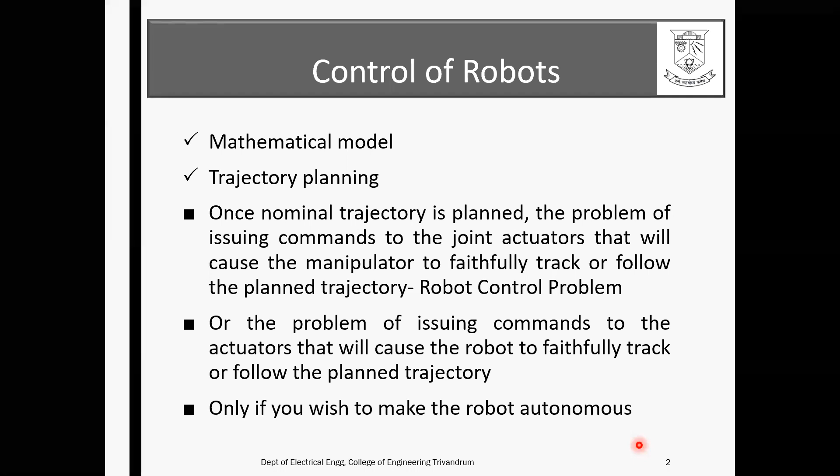See, otherwise, in some situations you don't need an autonomous robot. Okay, depending on the customer requirements, the robot can be autonomous, semi-autonomous, or whatever it is. Only if it is to be made autonomous, you need to proceed in this way, like the standard mathematical modeling, trajectory planning, and control.

So if you look at the standard design steps for the controller design, basically we'll start with a mobile robot or a manipulator. We'll try to get the mathematical model. So mathematical model means, as I was mentioning, it is basically giving the relation between the inputs and the outputs. Okay, the inputs and the outputs. Can I get a relation between these two?

So for example, all of us are familiar with a car, right? A car which we all are driving. So if you look at a car, what are the inputs to the car which we are giving so that we can successfully follow a track in a road? So we use the accelerator pedal, then we have the brake pedal, and then we use the steering. So we say that in a car, these are the inputs. We identify, when we take the car as a system, the accelerator, the brake pedal, and the steering.

So we are changing these three parameters for the car in order to get some x, y, z positions, or x dot, y dot, z dot values. See, when the car is moving in a gutter and all, we can definitely think that there are going to be these values. But see, we say that these are the inputs and these are the outputs.

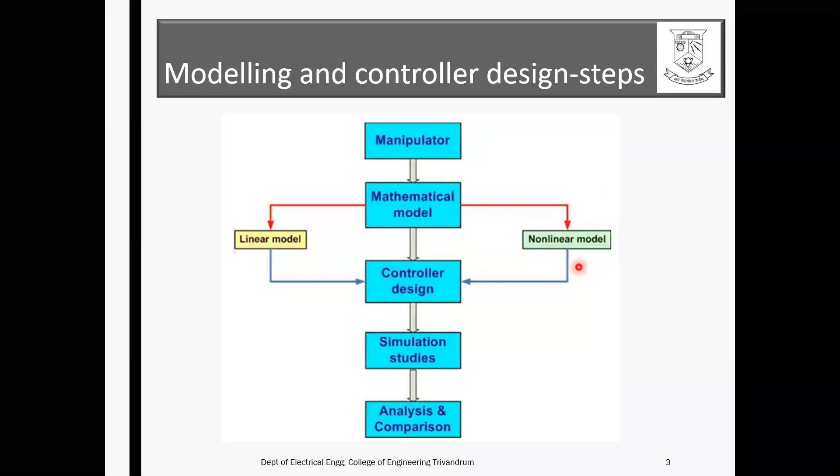So if it's a linear model, when we call a robot model a linear model, or any model, when it obeys the principle of superposition and homogeneity, we say that it is a linear model, else it is a non-linear model, and then we go for control design, right?

All of us are aware of a typical closed loop control schematic, wherein there'll be a system which we are going to control. There'll be a controller which is trying to help us achieve the desired objective. The desired objective will be given here. We'll be having the actual parameters, and we have the sensor, and if the actual output is not matching with the input parameter or the reference, the controller calculates inputs so that the actuator will act accordingly in order to get the desired output variable, right?

As far as robotics is concerned, instead of this, we'll be considering a robotic manipulator or a mobile robot. The one main point I wish to convey is that robotics is an interdisciplinary area, right? Wherein different engineers like mechanical, electrical, electronics, computer science can contribute. So it all depends on which area you are working.

There are some people who wish to model the robot using AI techniques and learning methods. If that is the way you wish to proceed, that is also possible. The only thing is that somehow or the other, you should know the input output relations of the robot, or what we call the model of the robot. So that's the main point I wish to convey.

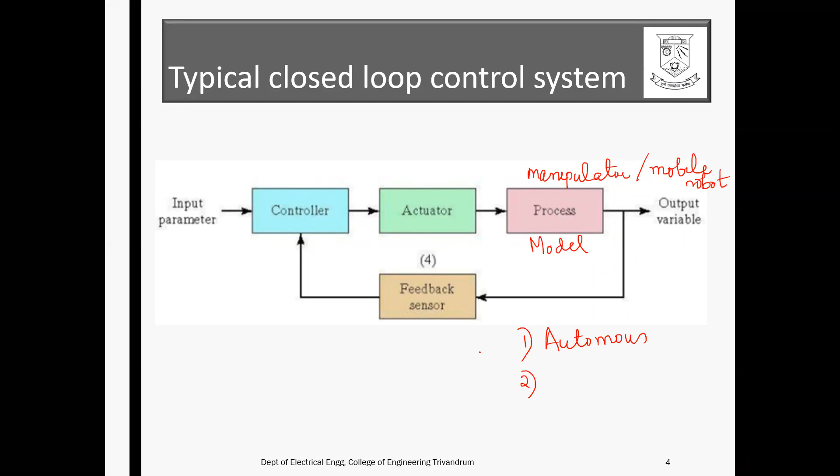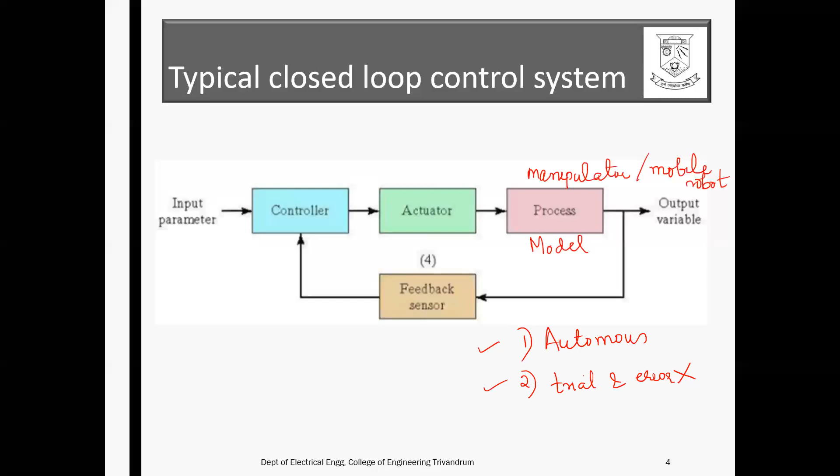The conditions are that you wish to make the system autonomous, that's the first condition. If you don't want to make your robot autonomous, no need of this. And two, you are not going to use trial and error. If you need these two things, then you should go for these kinds of control methodologies for control of the robots.

If you consider a robotic manipulator, as in the previous case I was explaining, you will be having the actual values. It will be the joint position and velocities. You will be having the reference values. In general, as it is represented as generalized coordinates, the reference will be given as the joint position, joint velocity, and acceleration. The reference and the actual value are compared. You have the sensor to measure that, and the controller will try to actuate the motors which are kept in the manipulator, so that you get the desired output.

In order to get the desired joint profiles, you may have to do something else. That is actually a trajectory planner, which is the outer loop. We'll be giving the desired task specification. That means the end effector has to move from this point to this point. That may be the task. Corresponding to that, the trajectory planner will be computing this. All these will be functions of time, q(t), q dot(t), and q double dot(t).

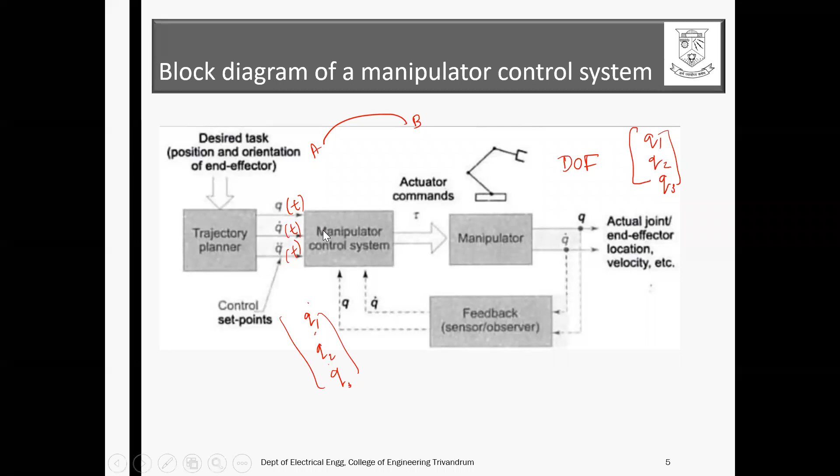Depending on the degrees of freedom of the robot, this q will have different dimensions. If it's a 3 degree of freedom robot, it will be q1, q2, q3. Three values will be there, and also q1 dot, q2 dot, q3 dot. So depending on the robot configuration, the dimensions will vary. This is a typical block schematic of a robot manipulator control system.

And this is the case of a mobile robot. In the case of a mobile robot also, if you try to solve the problem in a very simple way, you can say the desired X and Y positions are given. You need to just position the robot at a particular point. From one particular point, you need to reach another point. So if that is the case, you need to check.

This is actually the actual position, and this is the reference position. And then the actual values and the reference values are compared. Definitely, you need a sensor for measuring that. And then you compare these two, you will get the error. And the controller will be feeding the right wheel velocity and the left wheel velocity, which are the control inputs of the mobile robot.

Okay, so you might have done similar problems, maybe because you are interested in robotics. Some of your students might have done this problem. For example, imagine a situation, because nowadays many teams are working on employing robots in hospitals to support COVID affected patients. Suppose that is the scenario, and you wish to make the system autonomous.

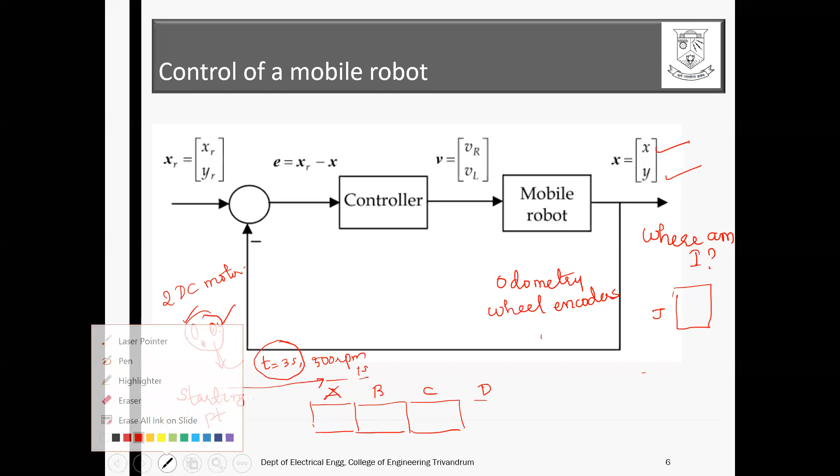So basically we can rely on odometry for knowing the answer to the question, where am I, but not for long distance paths. So basically I was referring to a practical example wherein these kinds of control play a very important role. So you don't have to solve that problem using a trial and error method.

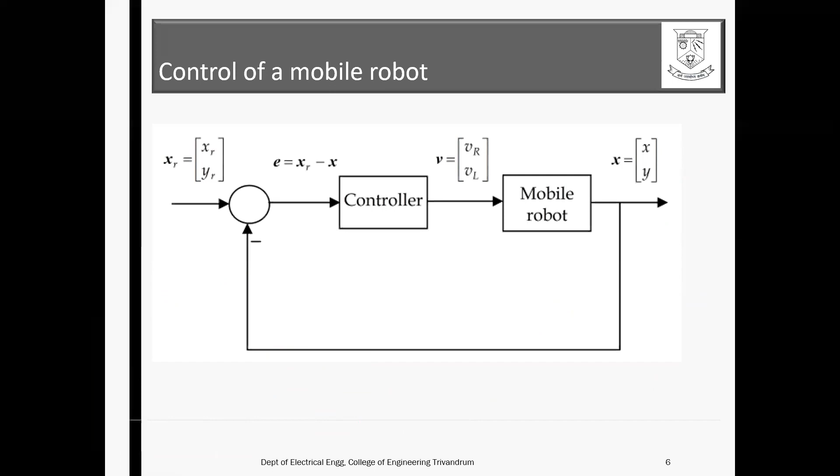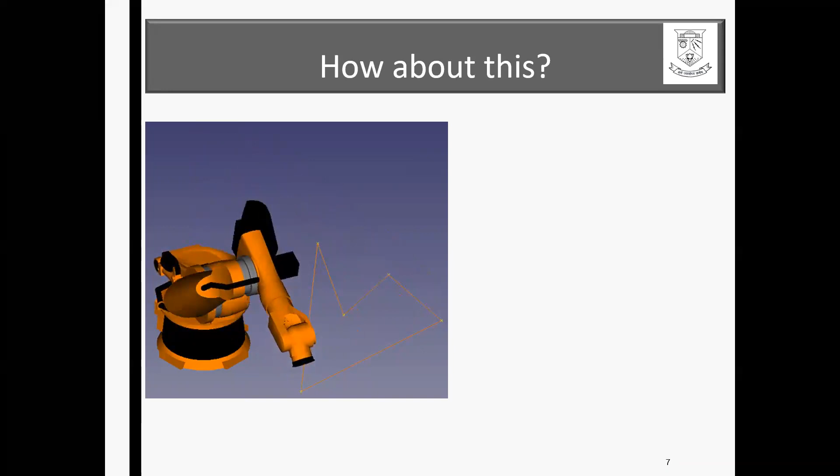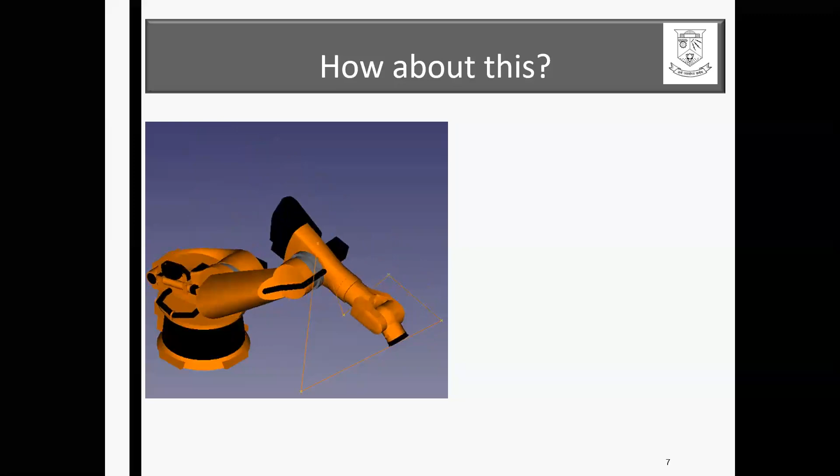Suppose you need to design a manipulator so that it moves through a path like this. Many times we see students working on projects or building manipulators, but they are not able to move the robot through desired points like this. The reason may be that they have not used the kinematic model. Just by trial and error they try to design the robot. That should not be the case, right?

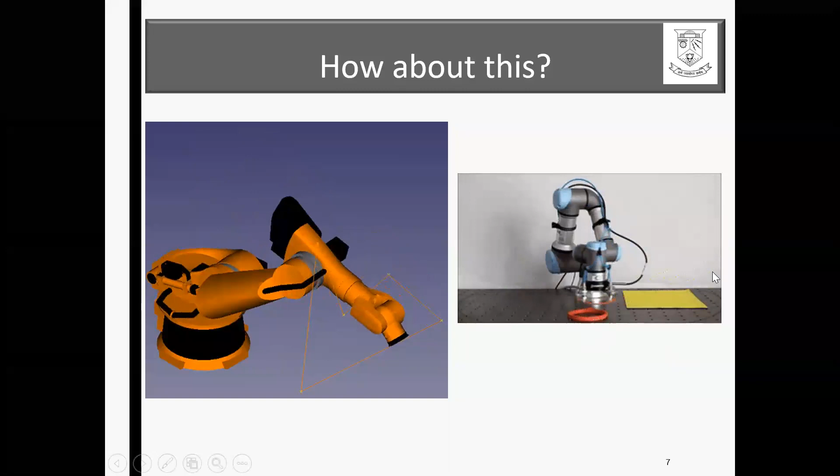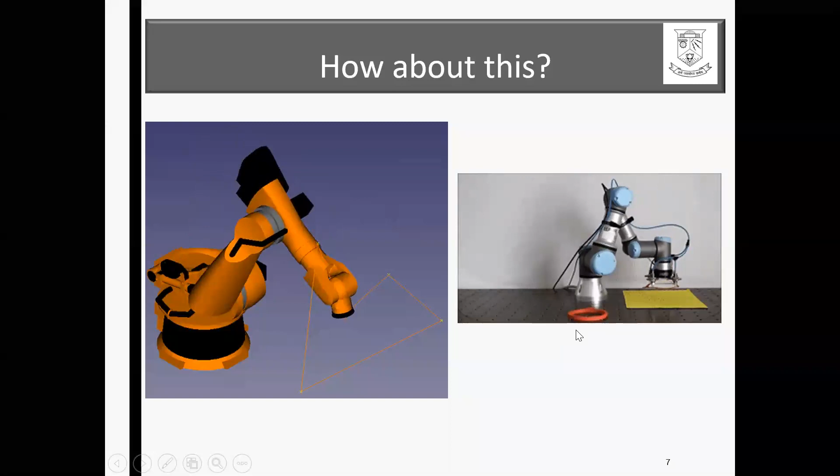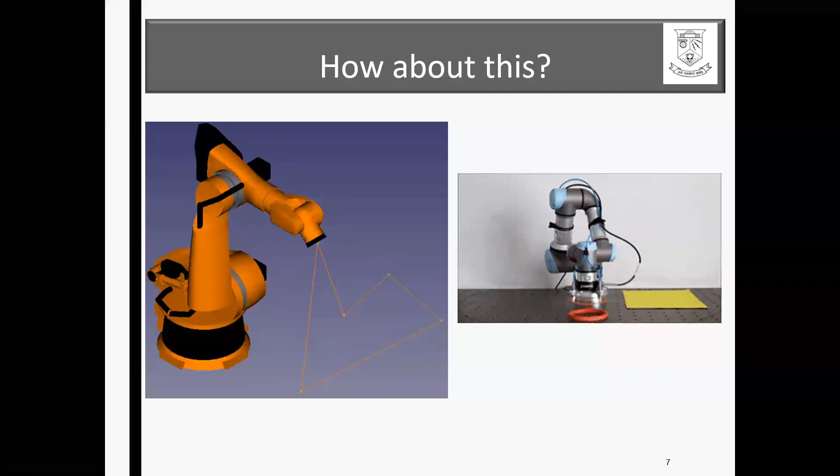Suppose you have a specific pick and place task like this, and this is a fixed point and this is another fixed point. You cannot vary them. So definitely you have to use the standard kinematic models. Only then will you know the workspace, whether I can keep the object at the desired location. All those things can be known only if you design controllers based on the model. So what I am trying to explain is the importance of knowing the input-output relations or mathematical model, and then designing the controller rather than trial and error.

And as engineers or as students, we tried to design line followers like this. So have you ever imagined a robot following a path without drawing a line? That means a straight line or circular path. It is possible, provided you have the input-output relations of the robot, and then you design a controller for the same.

So I'll show you an experiment done by my BTech students. You cannot see a line drawn, a circle drawn there, but you could see that the robot is moving in a circle, right? So how do we achieve this? Can you do this?

Suppose people try to solve this problem using trial and error method. But suppose when we wish to increase the radius, or change the center of the circle in which the robot has to travel, for all these things, you cannot do trial and error infinite times.

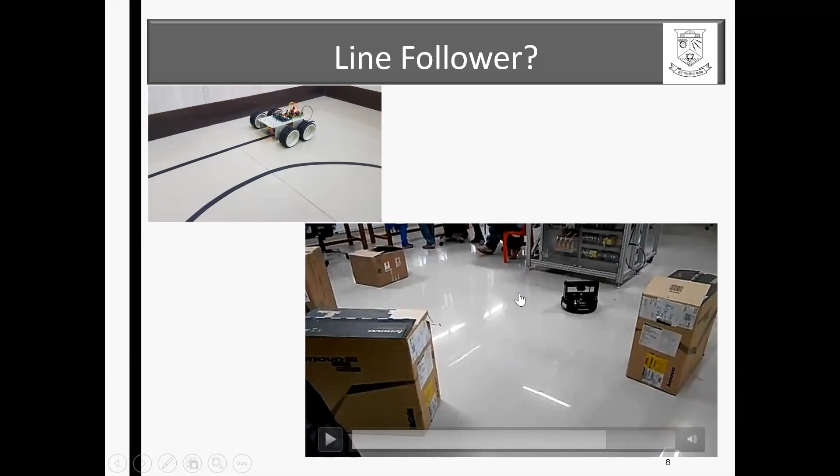So if you have these input output relations, and if you can design a suitable controller, you will be able to achieve tasks like this. If the robot is used as an office assistant, you cannot have a line drawn everywhere for the robot to move through. It should autonomously navigate and go to different staff rooms or office rooms. You might have seen robots moving like that. So you need to make it autonomous, and then only the robot should move forward.

So now what I'm going to do is take a very simple example of controlling a mobile robot, because this is the easiest way to convey the importance of taking the input output relations or mathematical model of the robot, and then designing a controller to make it autonomous. If you understand this concept, you will be able to work with a complex model as well.

So what I'm going to explain now is the control of a differentially driven mobile robot. If you look at this robot, you could see there are two wheels, but we know that with only two wheels there will be some balancing problems. So what we do is provide a caster wheel at the front, which acts as a support so that it won't topple. So if that is the situation, how do we model this robot?

I told you that to make a robot autonomous, we should have an input output relation. But that relation should not be a complex equation with many variables and 24 degrees of freedom. You start with a very simple model, work on that, and then incorporate other effects and proceed. That's the easiest way. So I have taken a very simple example so that all of us will be able to follow it.

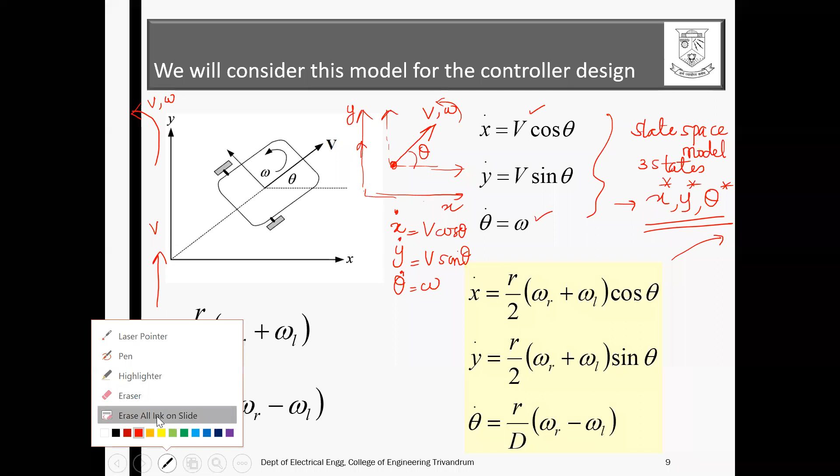But unfortunately, if you look at this model, when we take a robot in our hand, a differential drive robot, what we can directly control is this right wheel velocity, which we call omega r, and left wheel velocity. So this is just linear velocity and angular velocity.

Definitely we know that if you know the linear velocity and angular velocity of the vehicle, we can find what is omega L and omega R. There is a relation, right? It is directly given by the relation.

Linear velocity of the vehicle is actually r by 2, where R means the radius of the wheel, divided by 2 into omega r plus omega L. So the linear velocity is proportional to the sum of these two velocities, and the angular velocity is proportional to the difference in these two velocities.

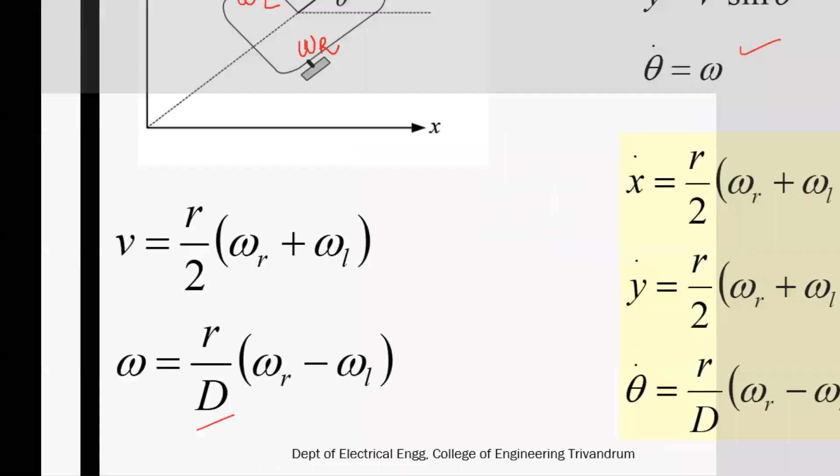D is the wheel base, we say. Wheel base means the distance between these two wheels. So that's the wheel base. And if you know these parameters, you have this relation.

So when we substitute this V and omega using this relation, what we are getting? In terms of omega R, the right wheel velocity and left wheel velocity, we are able to represent this equation. So this is the final model which we are going to choose. We say that the input variables are omega r and omega L, and the output variables are x, y, theta.

So I got this, and now what I need to do is just find what is right wheel velocity and left wheel velocity at each point of time, so that I can drive this robot to the desired destination or desired path. I'm not going to explain very complex controllers. I'm going to explain a very simple controller which will be able to do very simple tasks, which can be extended to realistic applications also.

Suppose if the robot has to be moved to a point, if we use a very simple proportional controller, that task can be achieved. How can that be done? I told you that if you look at this equation, the variables in our hand are right wheel velocity and left wheel velocity.

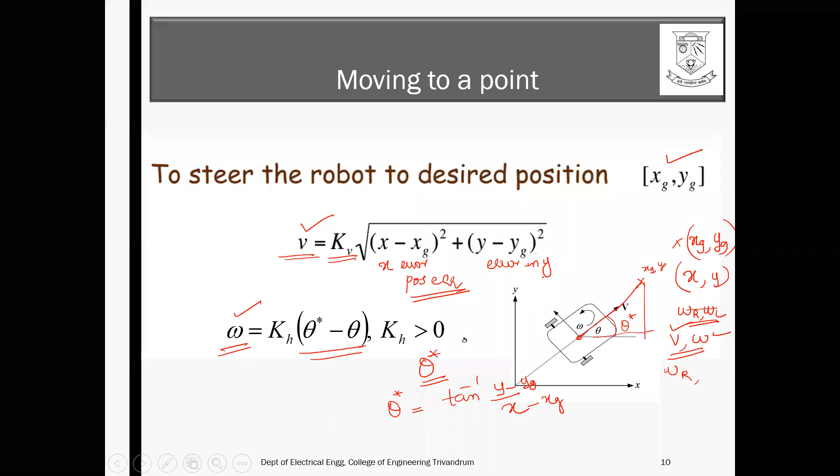So what I was mentioning related to the robot for helping or employed in a COVID ward, we can use a similar kind of algorithm where the v and omega, if we are getting from that, we can find left and right wheel velocity so that we'll be able to reach the destination.

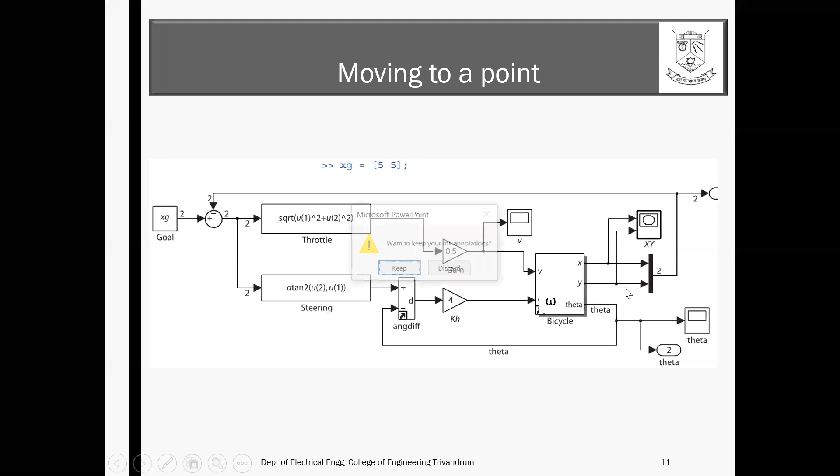Okay, so the same problem I'll just show you, which I have done in MATLAB. Moving to point, can you see the MATLAB screen? Okay, if you, okay, I'll run this.

So here what I have done is, I have taken the initial position as 0, 1 of the robot, and I have taken 5. Can you see the graph now? Yes ma'am. Okay, so see it is reaching the destination 5, 5.

So even if you change, see, I have given 0, 1, pi by 3 as the orientation. So if you look at this, 0, 1, pi by 3. So if I take 1, 1, let's see, we'll just check how. Maybe another color I'll take.

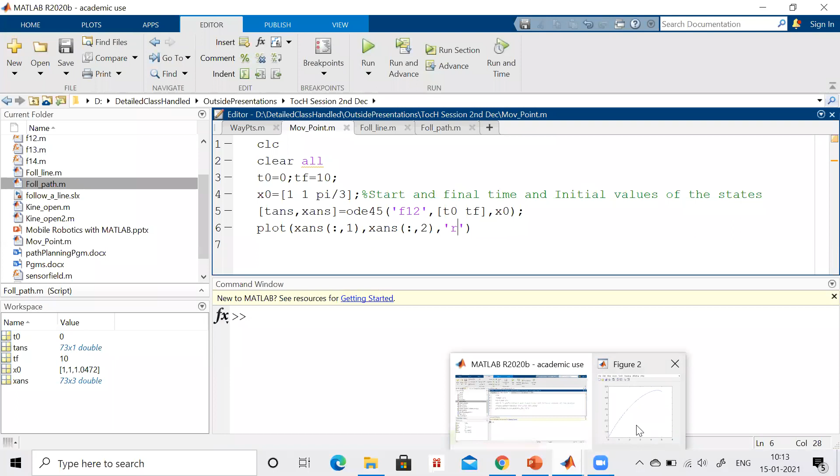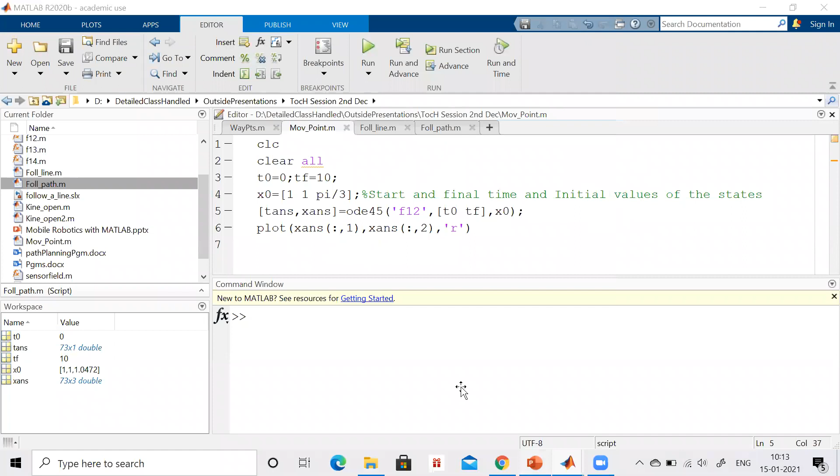See, from a different location also it is moving. So in the COVID ward case also, if you have different locations like this, point A, B, you will be able to use the same method for that case also. Okay, so the consolidated results are shown here, wherein you can see that from any location the robot is able to move to the desired location.

So here the destination is chosen as 5, 5. Okay, so there is no need of trial and error, right? You just find the value of left wheel and right wheel velocities from this equation. And then at each and every instant of time, feed that value to the robot so that it will autonomously reach the destination without trial and error.

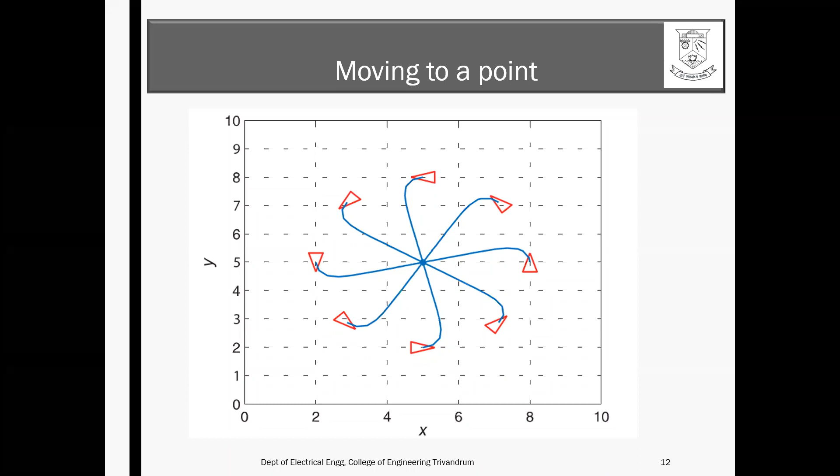So next task is following a line. Okay. So why am I taking these? Maybe some people may be thinking, okay, this is something trivial. Why should we do that? But why? Sorry.

Okay, why I am explaining this is because, see, if you can move a robot to a point, and if you can follow a line and if you can follow a circle, any trajectory following task will be a combination of all these things. Okay, so if we can independently do all these things, any realistic path is going to be a combination of all these things, right? So that's why I'm explaining this simple problem. The realistic scenario will be a combination of all these.

So if the robot has to follow a line, all of us are aware of a line follower robot where the line is drawn and over which the robot is moving. So just imagine a line virtually drawn in front of you parallel to your table, and you ask the robot you build to follow that line. How to achieve that? Generally what we do is trial and error, but that's not the case.

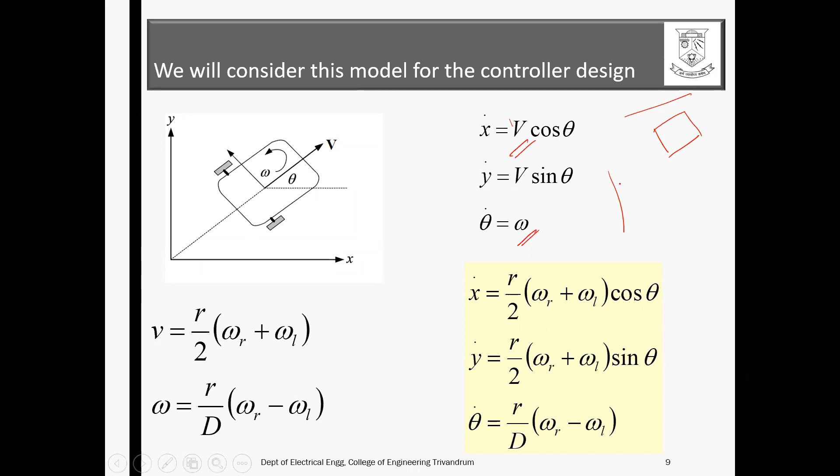What we need to do is just choose this model, and intelligently find what should be V and omega so that I can follow that line which is drawn parallel to my table, or wherever you are drawing, without that line physically drawn. So how do we represent a line? Line is represented as y equals mx plus c. Instead of that, you can also write a line as ax plus by plus c equals 0.

And suppose the robot position is this, and the line to be followed is somewhat like this. So what the robot should do is try to reduce the normal distance, right? So that is what is done here. One controller steers the robot to minimize the robot's normal distance from the line, which is given by this relation. So all of us know the distance between, sorry.

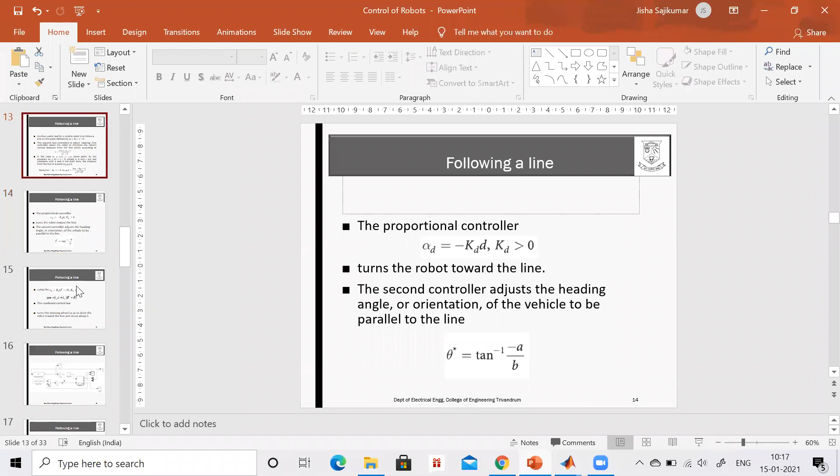So how to find the distance between these 2 points, that is, from where the robot is and the point in the line? In case of a line in the plane given by equation ax plus by plus c equals 0, where a, b, c are real constants, the distance from the line to a point x0, y0. So we have the line here and the robot here. You need to find the perpendicular distance, the normal distance.

Suppose the robot position is x0, y0. At each point you know the x and y value of the robot, then you can find the distance using the standard relation. And what we do is we will try to find a component which is proportional to this distance. So we should try to reduce this distance, right? Simple logic. So you need to use one term like this.

This one is trying to reduce the distance. Another one is it should turn towards this direction, right? So that is achieved by using theta star, the reference heading angle, equal to tan inverse minus a by b. So if you have a y equals mx plus c line, we know slope is m.

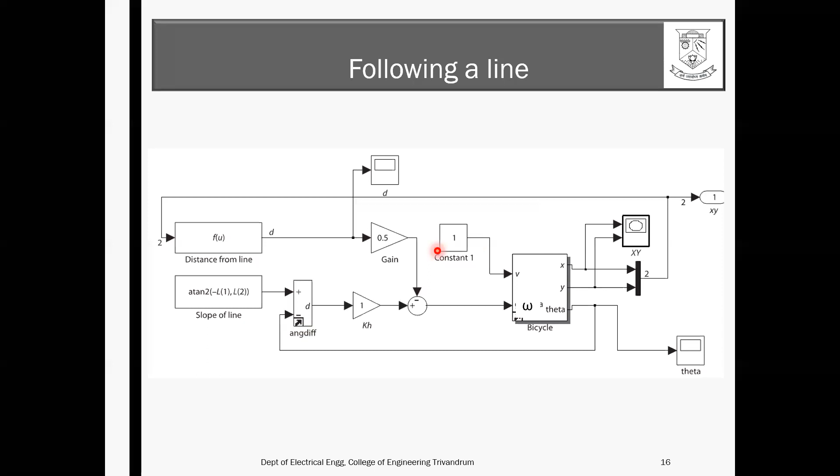But see, this is only the angular velocity, right? The linear velocity can be chosen as a fixed value, and angular velocity can be given like this, so that the robot will turn towards that line and it will be following that line. So this is the typical block diagram. Distance from line is calculated, the slope of the line is calculated, and the controller will try to, it's a very simple control. See, the linear velocity is chosen as 1 and angular velocity is chosen using this expression.

So if we have A, B, C as 1, minus 2, 4, we have the straight line like this. And suppose the initial position of the robot is 8, 5, pi by 2. So the mobile robot heading angle is like this, and it will be following the line in this way. So wherever you draw a line, it's just a matter of finding what the A, B, C values are, and then you give the initial pose of the robot, so that the robot will be following that line.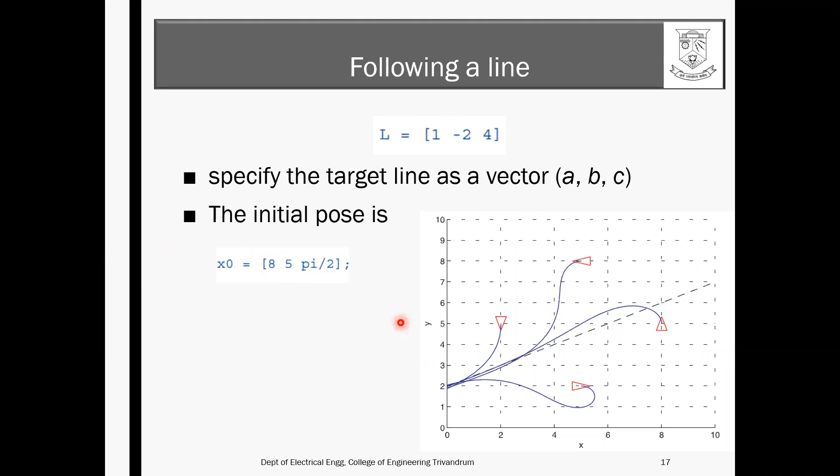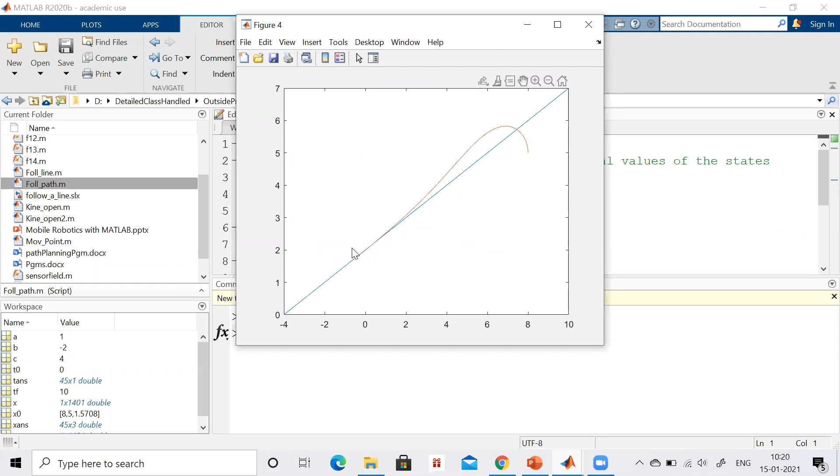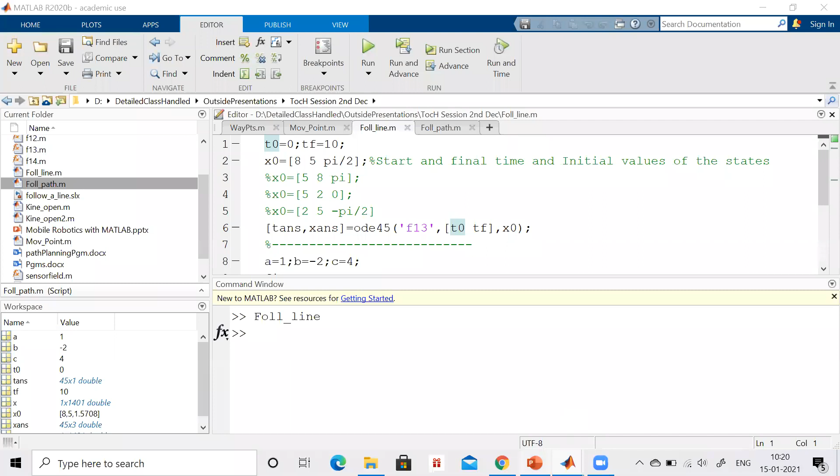So I was showing the simulation of that as well. See, the line is chosen, and this is the initial position of the robot, and the robot is able to follow the path. So basically for initial testing and understanding of the algorithm, MATLAB is the best option. Once you are comfortable with that, you can switch to realistic processors to implement the same.

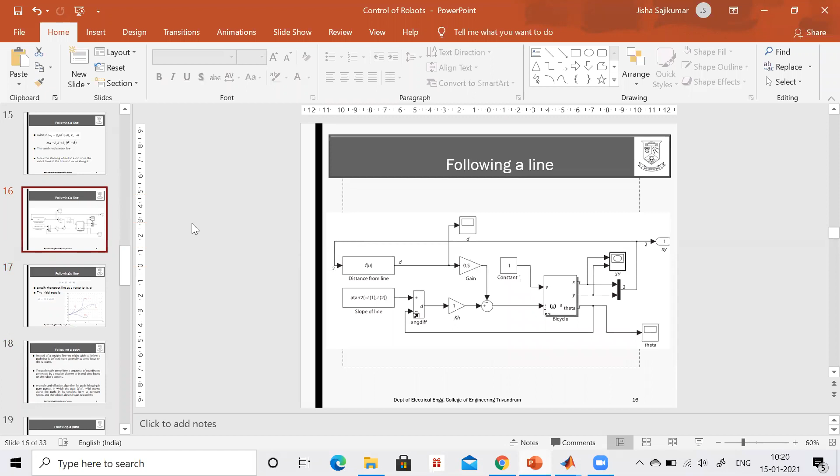So suppose you wish to implement this particular controller in hardware. How will this work? We have v equal to 1 and omega given by this expression, right? So at each and every instant of time, you need to know what is x, what is y, what is theta. So you need to use sensors, encoders, to find x, y, theta.

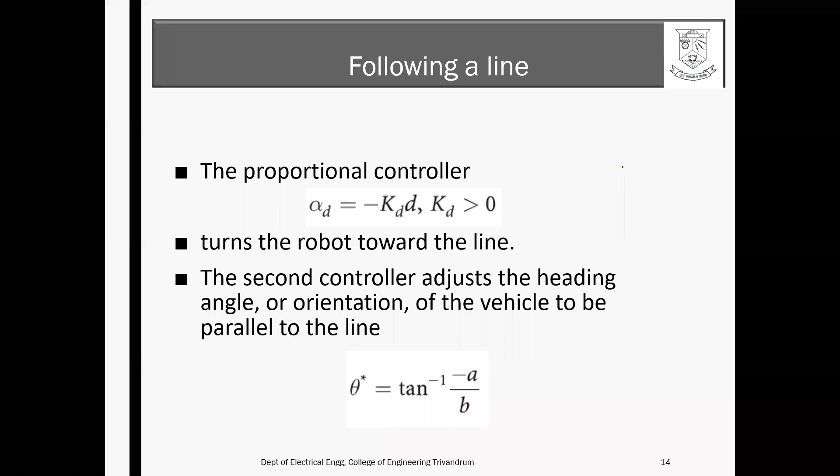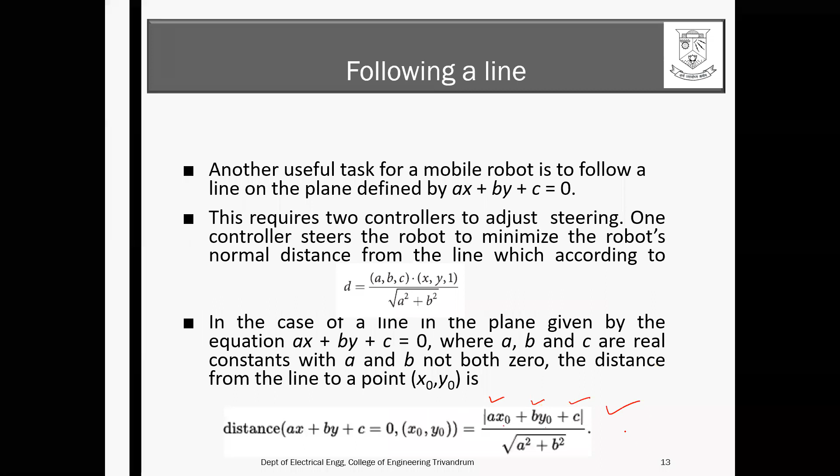And you have the a value, b value, c value, and you have x and y at each and every point. So at each and every point you can compute d. You need to take sensor feedback: at each point you take sensor feedback, x, y, theta, and compute d. Then for omega, you compute kd into d, and also kh into theta, so that you get the value of omega. So you got the value of v and omega.

From this, for each sampling instant, you find omega R and omega L. Then in the next program, you drive. For different controllers, the command will be: drive motor 1 at the omega R value you got, and drive motor 2 at omega L. So for basic understanding, definitely this will be helping.

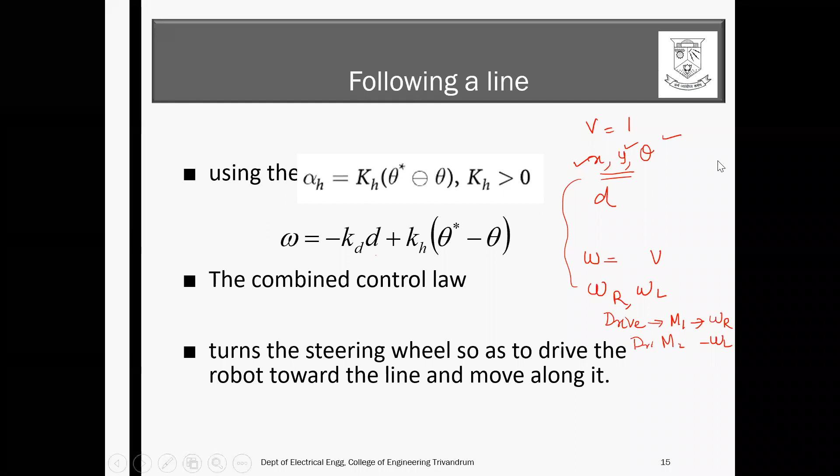And similarly, the more realistic case is following a path. Following a path means a curved path, or a circle. If you can solve the basic problems like moving to a point, following a line and following a path, you'll be able to follow any complex path. It's just a matter of representing that path. How do you represent a path? That is very important.

For example, just imagine you are driving your car and taking a circle. If that is the situation, what will be the x of t and y of t profiles?

So this is in the xy plane, on the ground. Your car is taking a circle, so you should know what the x(t) profile and the y(t) profile are. So you should have an understanding of the reference profiles. Generally, if the car has to take a circular path, you can just take sin t and cos t as the reference. You will be getting a circle with (0, 0) as center and 1 meter as radius.

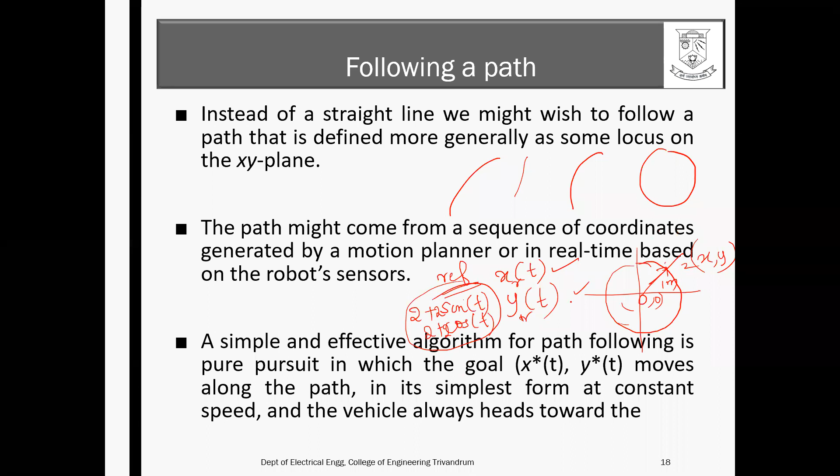If you wish to change the center to (2, 2), you need to give the reference as 2 plus, like that. If you wish to change the radius to 2 meters, it's just a matter of giving 2 here also. So by properly choosing the reference trajectories xr(t) and yr(t), you will be able to get the desired trajectories.

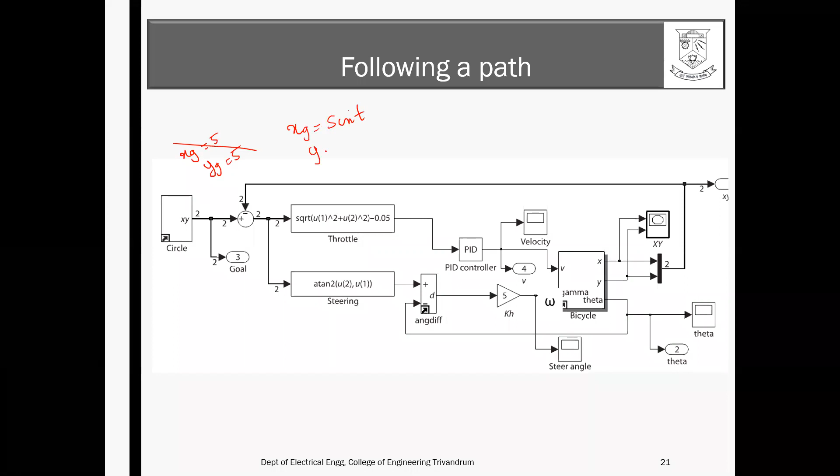Okay. So the following a path problem can be solved in a similar way as the moving to a point problem. The only thing is that instead of the constants in the previous problem, where xg was given as 5 and yg was given as 5, for following a path, suppose it's a circle of radius 1 meter, you need to give xg equal to sin t and yg equal to cos t. It's just a matter of changing that so that it will be following a circle.

Okay, so now I move on to the control of manipulator part, wherein, suppose you have a robotic manipulator, which is a two-link manipulator, and the robot end effector has to move in a straight line. There are different ways in which we can solve this problem. This is one of the ways. This end effector has to move in a straight line. That's the condition.

In resolved motion control, we choose the Cartesian velocity, that means the end effector velocity, as v, and convert that to the required joint velocity using this Jacobian. You might have studied in previous sessions how, if you have the end effector velocity, to get the joint velocity by using the Jacobian matrix. So at each instant of time, you need to compute that so that you will be able to move the robot in a desired way.

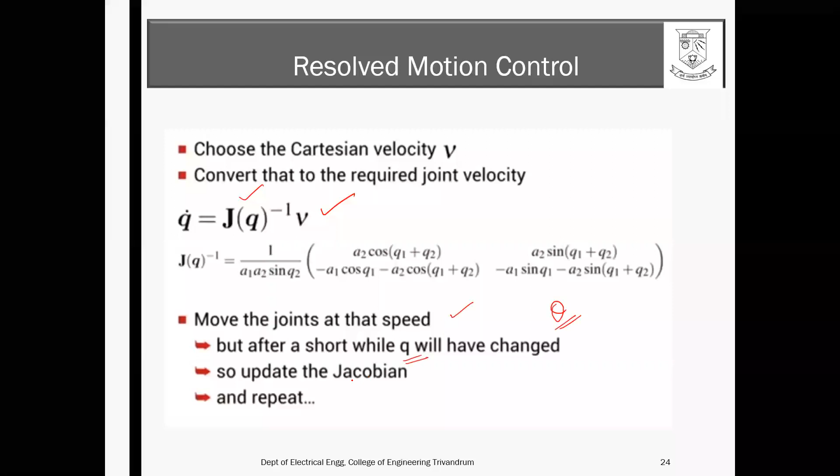So you need to move the joints at that speed. At each point, q will be changing; q means theta, the joint angles will be changing. So we need to update the Jacobian, and the process is repeated. For example, you might have done problems using the 2R manipulator, which is a very simple planar manipulator. You might have done the forward kinematic model, which is actually a 4x4 matrix using the DH convention.

When you solve that, we have the rotation matrix and the translation, the position information and rotation information. From this position expression, you can get the Jacobian. First you need to differentiate. This is actually theta 1 and theta 2. When you differentiate with respect to theta 1, you will get this. When you differentiate with respect to theta 2, you will get this. And when you differentiate this one with respect to theta 1 and theta 2, you will get the Jacobian.

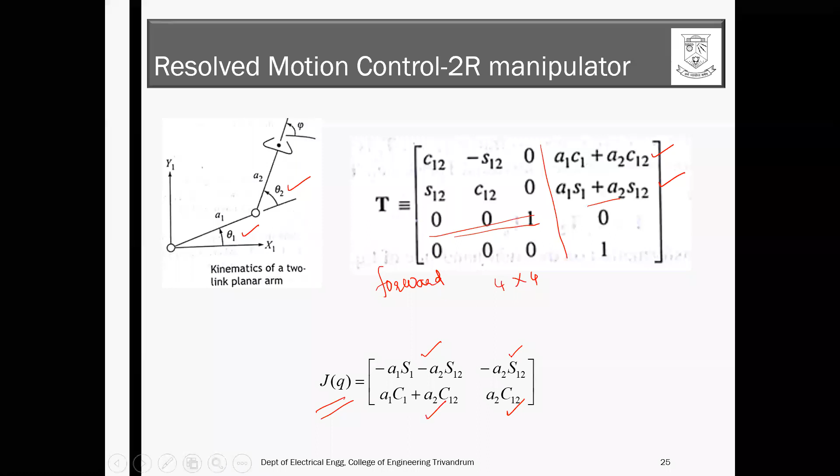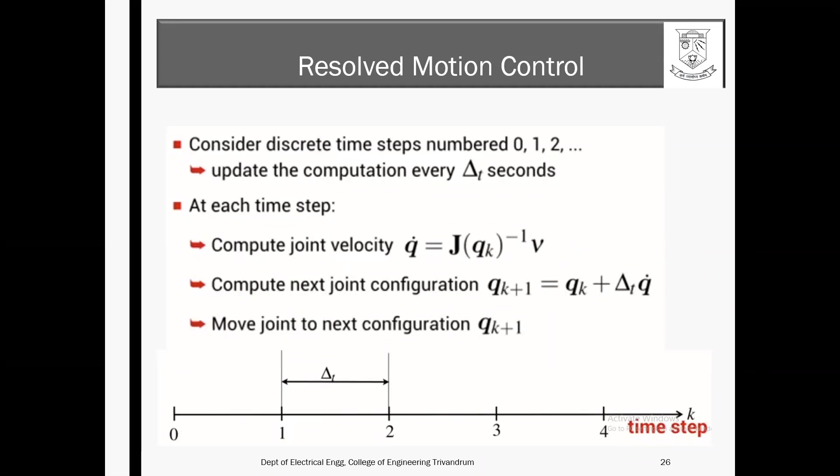Once you get that, it's just a matter of computing the joint velocity at each instant of time so that the robot end effector will be moving at the desired velocity v. Okay, so this is one way of solving this problem wherein the end effector has to move at a particular velocity. Okay, and another famous problem which we will be studying. One second.

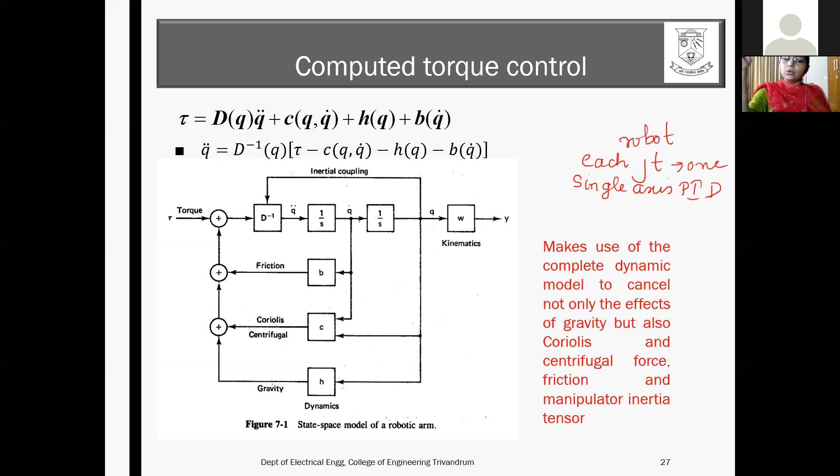But we cannot always say that the robot will be moving very slowly, one joint at a time. If that is the case, we have to take the complete dynamic model of the robot, which is generally given as tau = D(q) q double dot + C(q, q dot) q dot + h(q) + b(q dot), where this is the inertial forces, this is the Coriolis and centrifugal forces, this is the gravity force component, and this is the friction component. I hope that you know the dynamic modeling part and are aware of this model.

Basically, suppose in the COVID... Ma'am, your mic is muted. Okay, sorry.

Consider the case of a COVID robot, that is, a robot for helping COVID affected patients. If the payload taken by the robot is very small, then as I was mentioning, the left wheel velocity and right wheel velocity can be given. But suppose it is delivering food to the patients, some 20 to 50 patients, so the payload will be more. In that case, you need to give tau 1 and tau 2 as the control inputs to the robot motor, so we have to use this dynamic model.

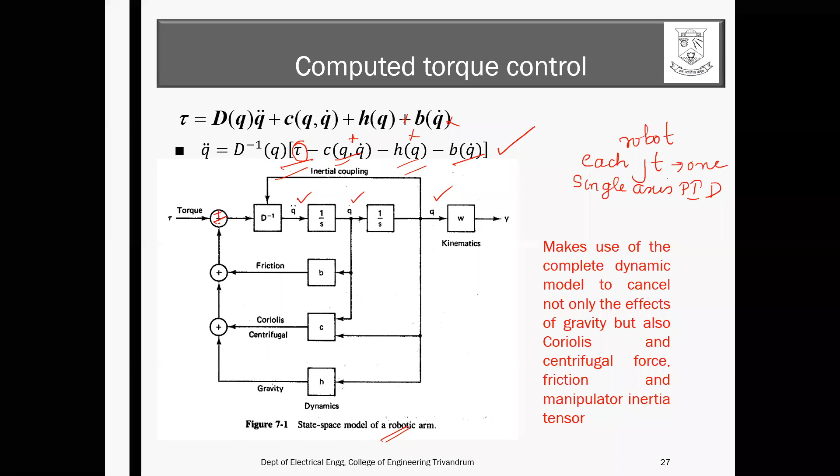So as I was telling you, we choose this torque intelligently so that these terms can be cancelled and desired dynamics can be enforced. You can see here, the torque term is taken as H tilde Q. This is actually the gravity term, Coriolis and centrifugal force term, friction term. So all these terms are taken as plus. When you substitute that here, all these terms will get cancelled.

So then the remaining part is actually a kind of PD controller, plus R double dot is given in order to get an anticipatory action, so that this will be enforcing desired dynamics to the system. So this will cancel the nonlinearities, this will enforce desired dynamics, so that the manipulator will be able to move successfully from A to B, or it will be able to follow the task as required.

So the main attraction is one more extra part, R double dot, which helps in anticipatory action, because generally when we give R, suppose the reference trajectory is like this. If you give R dot or R double dot, you have an idea of what the future is going to be, how R is changing. That indication you will be getting from these values. So that is why R dot is given, and this will help in better tracking when the robot is moving fast.

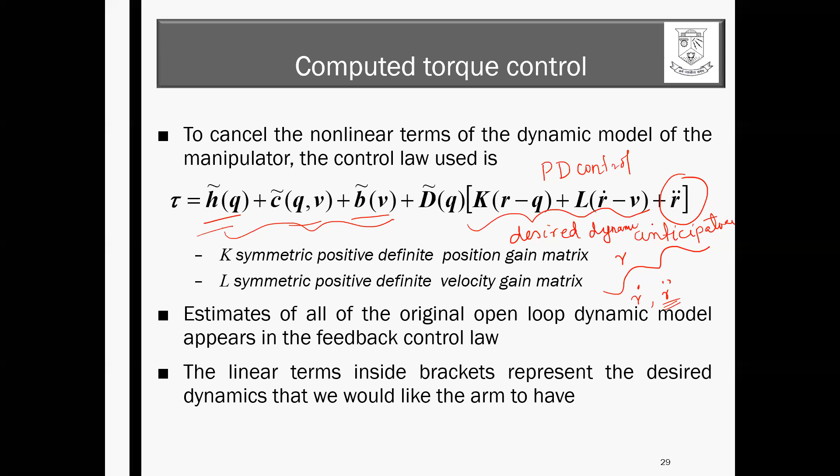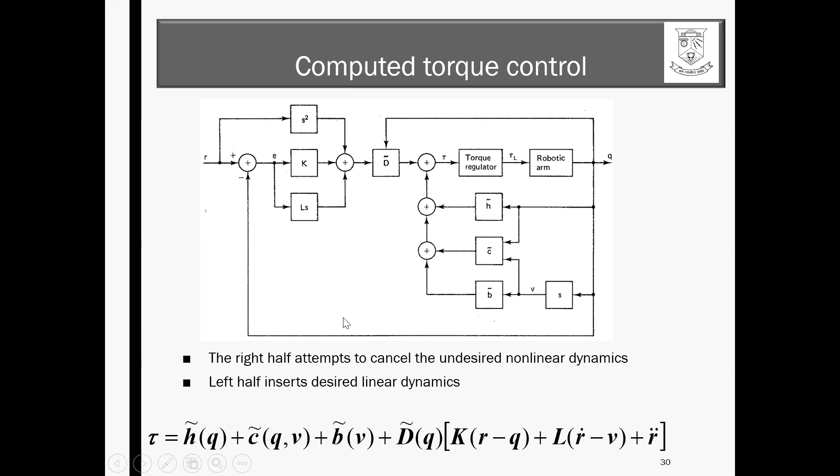So that's what is written here. The right half attempts to cancel the undesired nonlinear dynamics, and the left half inserts desired linear dynamics. So it's not a simple diagram, but once you have a basic understanding of all these, it is easy to follow. And there are linear as well as nonlinear control schemes.

So suppose if you wish to make a robot autonomous, what you need to just do is try to get very simple input-output relations. You need not take a very complex model for getting that, and then check whether it is a linear model or a nonlinear model. Definitely when we try to model the robot, you can see that robots are in general nonlinear models. So we'll try to linearize that model. We have methods to linearize that.

And if we can linearize that, we can use PI and PID controllers or state feedback controllers. And optimal control methods can be used for linear models as well as nonlinear models. So you'll be able to compute the best control values, maybe the best linear and angular velocities in case of mobile robots, or the best angular velocities or position profiles for servo motors you're using for the robotic arms.

And if the models you are getting are nonlinear in nature, we have plenty of methods like computed torque control, feedback linearization. So there are different ways in which you will be able to do that. Maybe if your background is controls, you can work with all these things. But generally, yes,

So I'm going to conclude. Basically, robots are dynamic systems generally represented as nonlinear models. If it is not moving fast, we can use even linear methods, which I have explained using the basic control method, PI control, P controller itself. But based on the requirements, you can choose the kinematic or dynamic model. If payload is more, go for the dynamic models, otherwise kinematic models are fine.

Once you get that model, you need to identify which are control variables, which are state variables, and output variables. Depending on the model, suitable controllers can be designed to make the system autonomous.

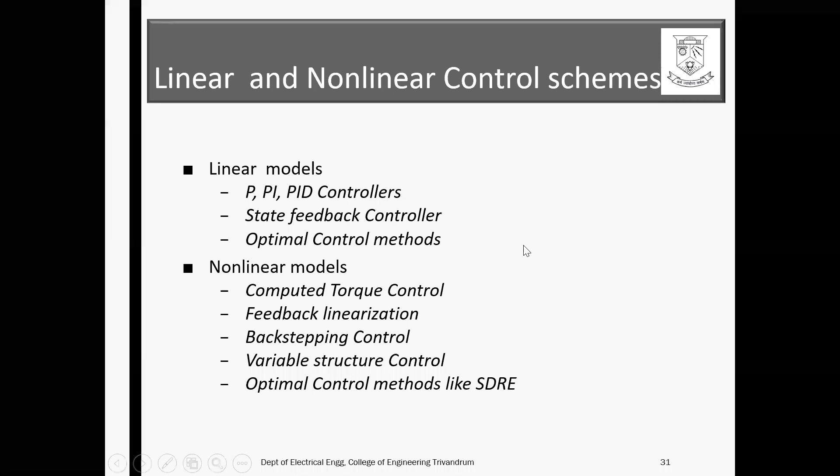Mainly people who are working in ROS and all, it's a very powerful platform, and Gazebo and all, wherein the physics can be incorporated. So try to understand the physics behind that and try to work on that. Instead of downloading a standard program from somewhere and working on that, based on the model, try to use at least some of the standard controllers so that it will work perfectly.

And anything else? Advice on books that are good.

For control, many of the topics which I covered today are taken from Peter Corke's textbook. You may be aware of that. He has actually shared on his website a toolbox also, where you can practice all these sample algorithms of control problems. It's a very good book you can refer to. And standard robotic books you can follow are that of Schilling, Mittal, Craig, Saha. There are a lot of books which you can refer to for basics.